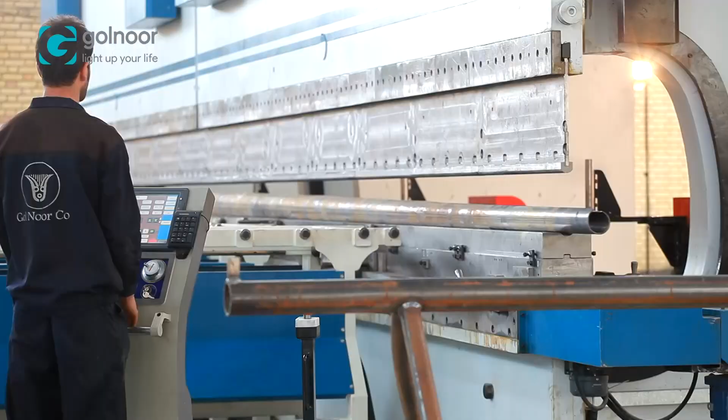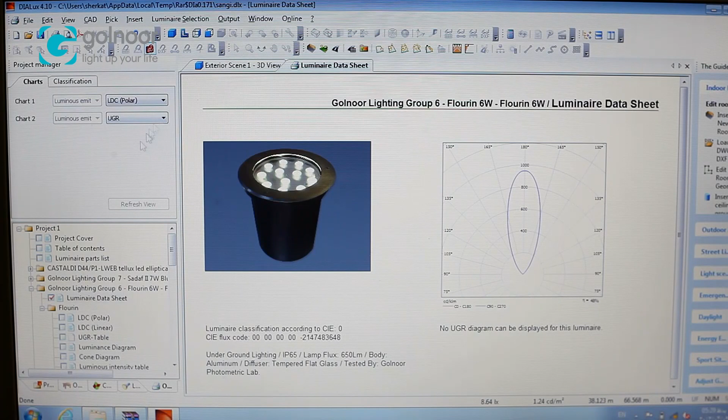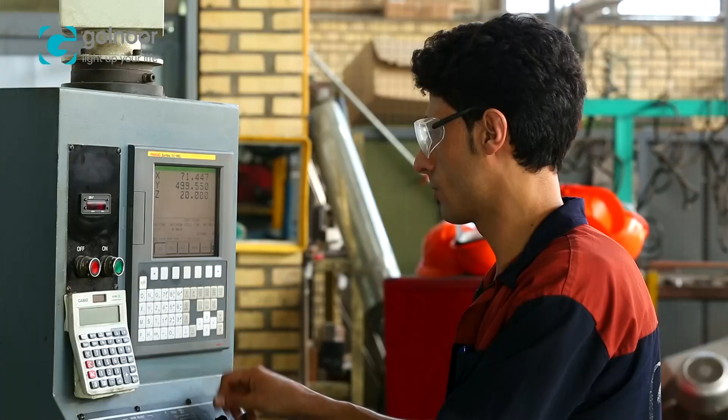Golnoor, as a pioneering company in lighting industries in Iran, has obtained an outstanding position among lighting producers through modern science, advanced technologies, specialized workforce, and efficient management. Since the initiation of its activities, Golnoor has been able to introduce itself as a designer and operator of the greatest architectural lighting, general lighting, and solar energy projects in various regions. This has been achieved as a result of permanent commitment to high quality, continuous development, use of technical knowledge, improvements in production lines, and provision of customers' demanded services.

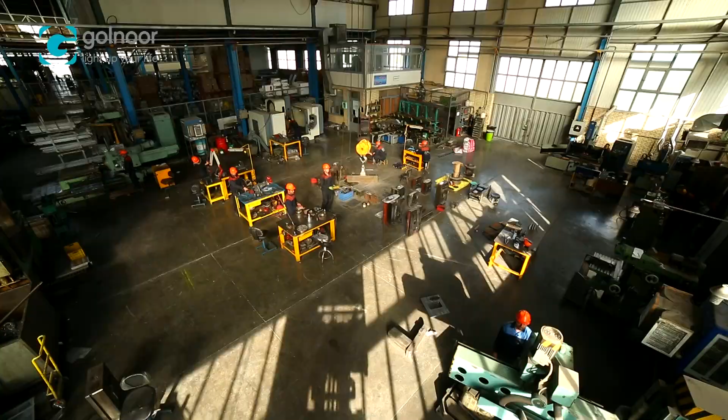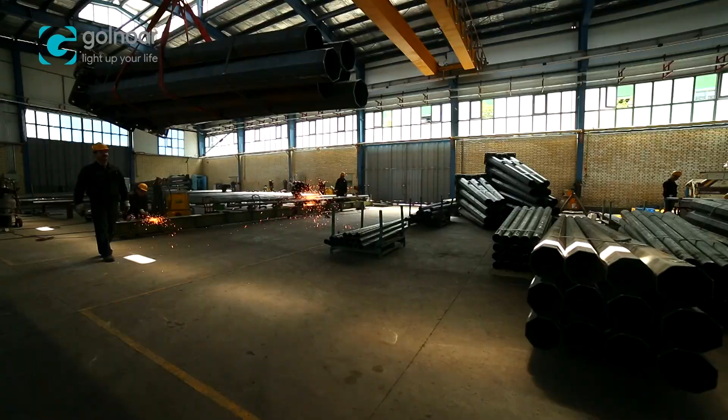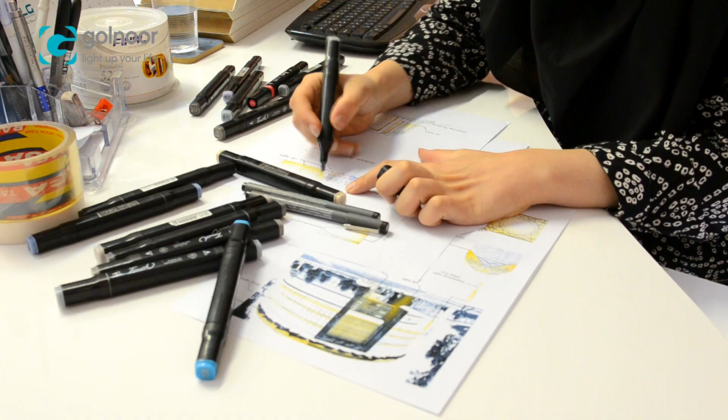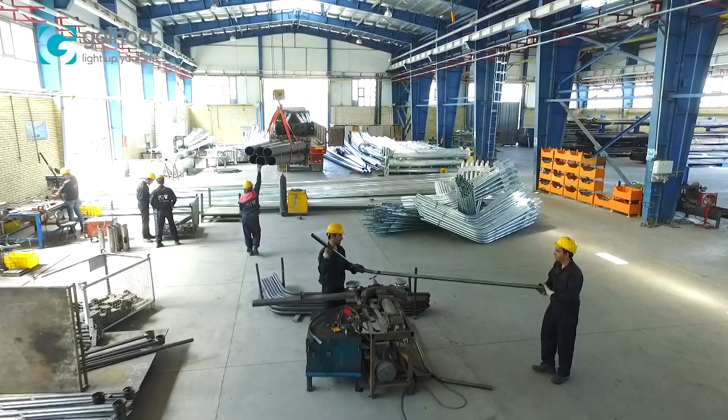Various updated workshops including molding, die-cast, machining, pressing, electrostatic painting, mechanized production of lighting poles and metal structures, diverse assembly lines, modern laboratories cooperating with the standardization organization, together with a wide range of specialized and experienced experts in electronics, mechanics, architecture, civil and structural engineering, industrial design, urbanization, alternative energies, metallurgy, and chemistry have all contributed to presenting Golnoor as one of the largest producers of luminaires in the Middle East.

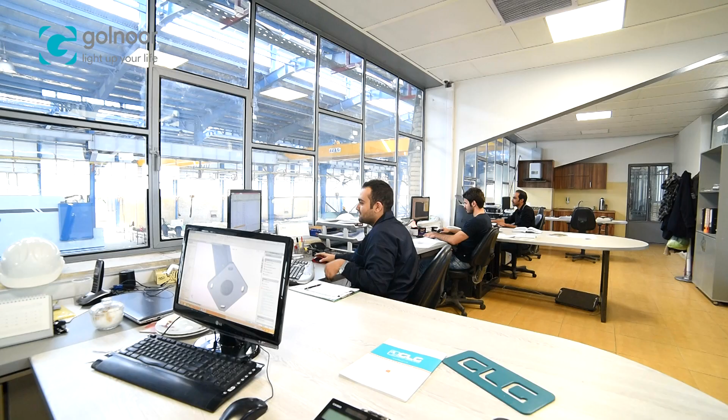Products and services offered by Golnoor are design and production of lighting products applicable for urban areas, consultation, design, production, product supply, along with operation of and supervision on lighting projects, design and production of various integrated steel structures such as lighting, decoration, solar power plants, traffic, telecommunication, and power transmission structures.

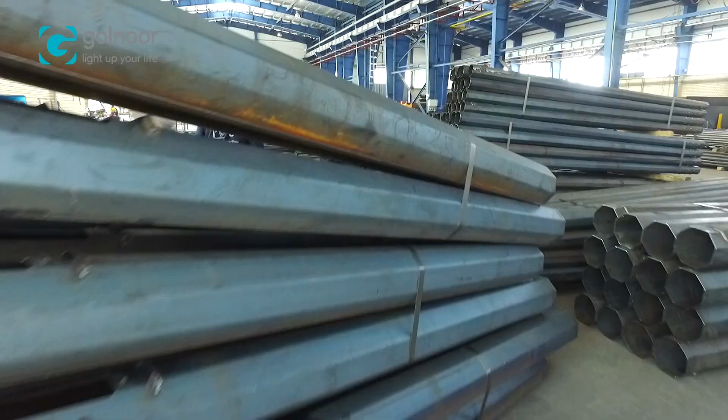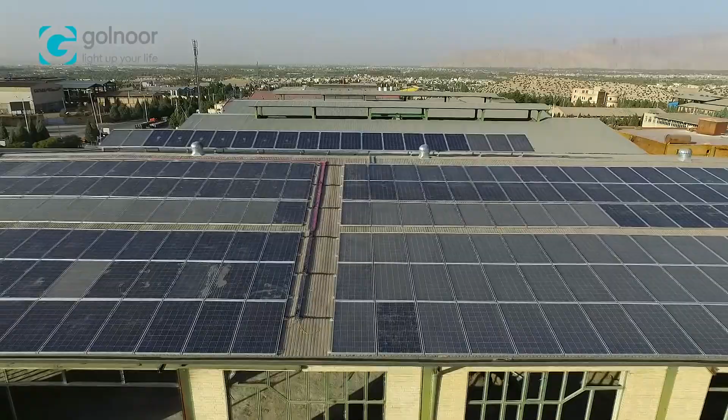Design, production, and supply of anti-explosion electrical equipment used in oil, gas, refinery, and petrochemical industry. Design and operation of projects with regard to solar power plants and solar lighting systems. Design and production of lighting products required at homes and administrative commercial areas.

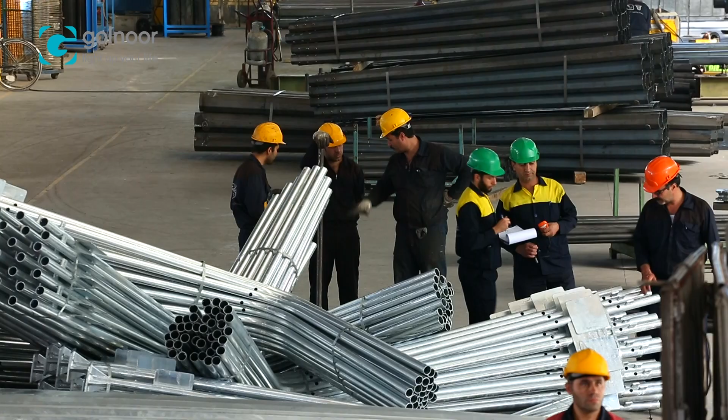Precise observation of national and international standards, along with technical knowledge and expertise, specialized workforce, and provision of diverse products has enabled Golnoor to improve and expand the national market of products by means of establishing dynamic offices and branches in different countries, and also to export its products to more than 30 countries around the world and earn the title the National Premier Exporter for several years.

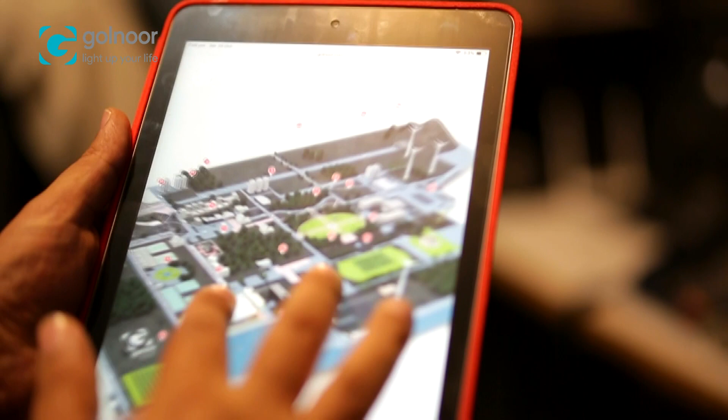Golnoor has always had continuous and effective connections with customers by holding a variety of exhibitions and educational seminars, while having a remarkable and effective presence in the social media, which all have helped Golnoor provide the best after-sales services during the shortest period of time.

Today, honored by our bright history, we are constantly trying to truly understand the current societal needs and develop our products and available services based on factors such as greater efficiency, better function, smartization, and capability to save energy. These are to preserve the environment and reduce ecological damage, since promoting today's welfare and creating a better future for people will not be possible unless expectations such as energy efficiency consumption and environment preservation are met.